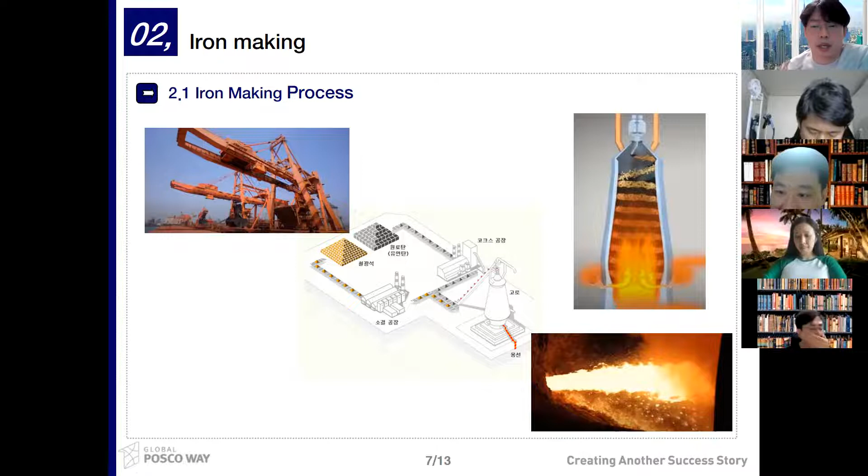We call this molten iron, not steel, because it contains a lot of impurities like carbon or sulfur. So after the steel making process, we can get pure steel. This is the steel making process.

By using this kind of torpedo car, which looks like a potato, we carry the iron to the steel making place and pour it into something that looks like a jar stove. We blow pure oxygen into this stove, and the carbon or sulfur is burned out through this steel making process. Then we can adjust the material composition and temperature to what the customer needs.

The next step is the continuous casting process. As you can see, this is a kind of mold, so we can solidify the liquid into this intermediate product, which we call a semi-product. By the shape of this semi-product, we can call it slab, bloom, or billet.

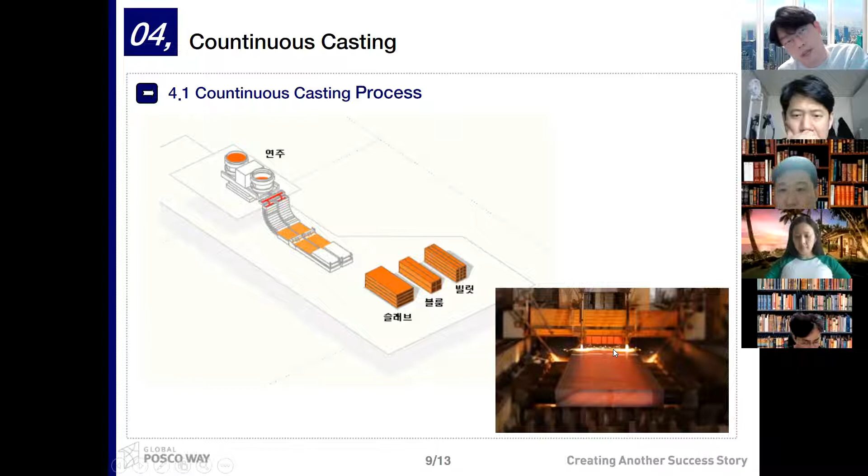As you can see in the picture, this is the real shape of the slab. Because this is continuous casting, we have to cut it with something like a laser cutter, I think.

The last part is the rolling process. When we reheat the semi-product, we can easily extend it by passing it through the rolling mills. We call this a mill. It consists of 2, 3, or more big rolls, and we can extend it to make it thin, producing the final product.

We call these hot rolling, cold rolling, heavy thick plate, and wire rod kinds of products. I know it's really boring, so I prepared some clips to explain about the products.

This hot rolled product is used widely as construction materials and pipes in various industries.

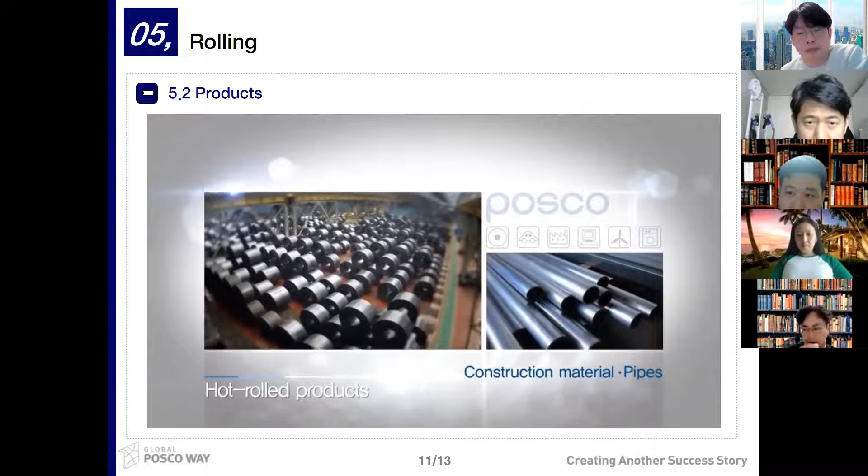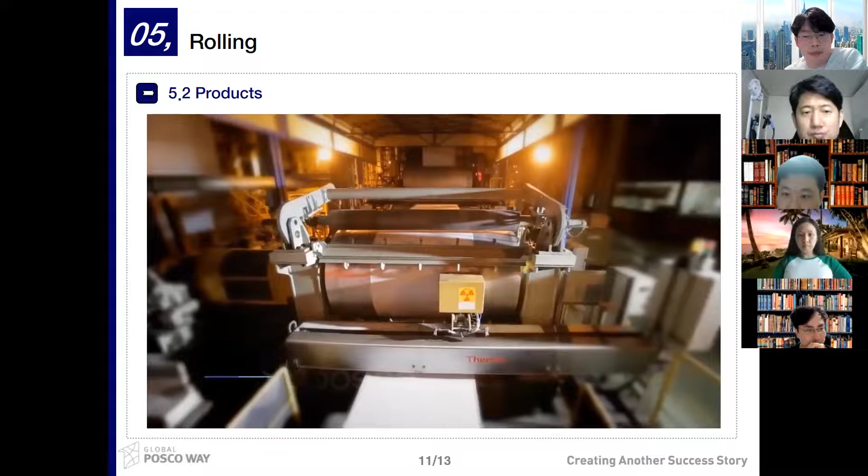Cold rolled products, which are created by making hot rolled products thinner at room temperature, are used in general appliances, barrels, and automobile frames. Coated steel, which is created by coating cold rolled products with zinc, is used in high-end appliances, office equipment, and automobile exteriors.

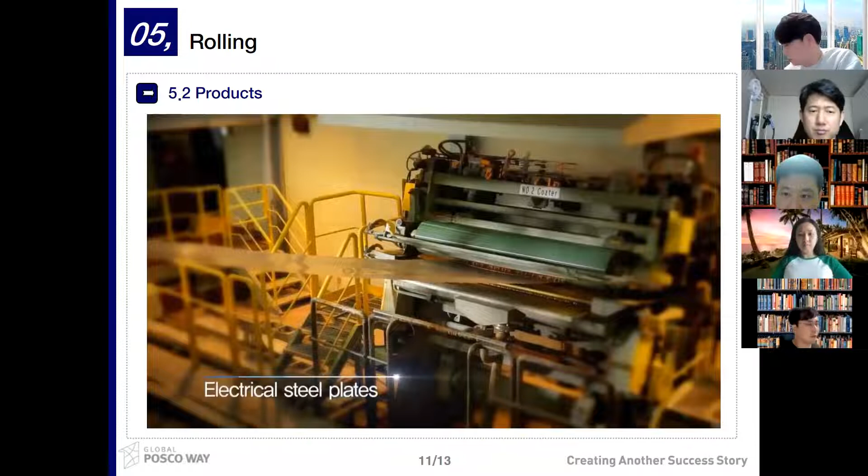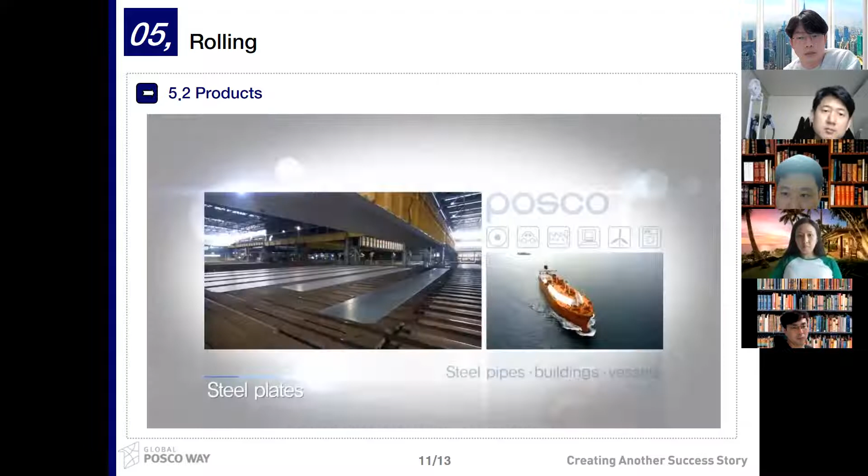Electrical steel plates, which improve electromagnetic properties by adding silicon during the steel manufacturing process, are used in transformers and motors. Steel plates, which are thick and rectangular in shape, are used in large structures such as buildings, vessels, and oil pipelines.

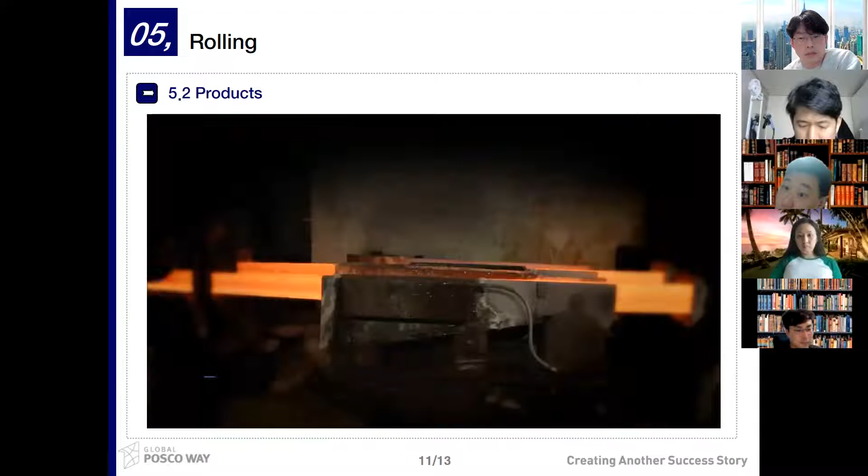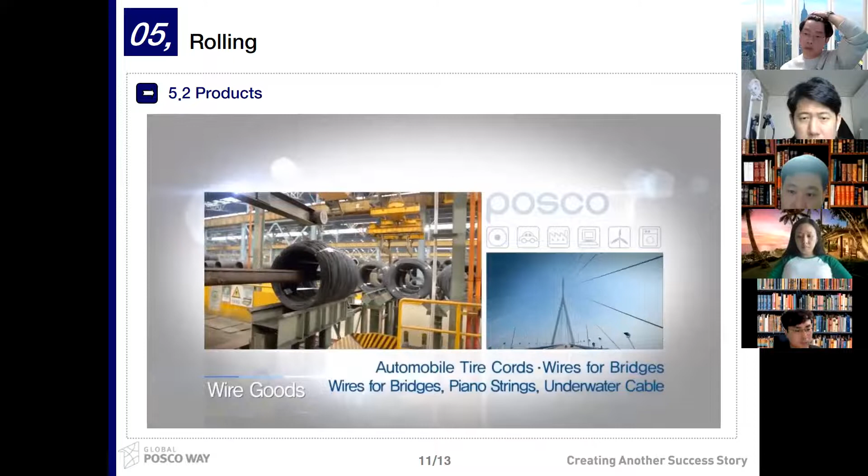When a billet is heated over 1000 degrees Celsius and passed through a roll with a round hole, it turns into a thin and long wire rod, which is used as automobile tire cords, wires for bridges, piano strings, and underwater cables.

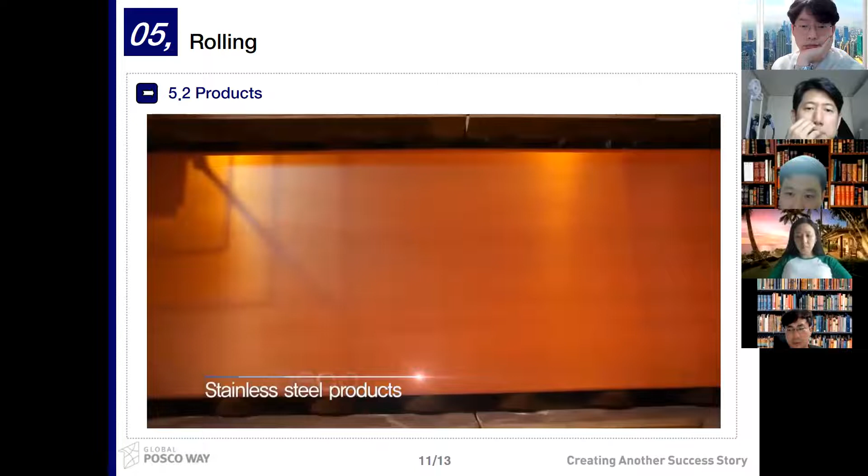At the stainless steel plants, which are equipped with additional production facilities, nickel and chrome are added to steel to produce stainless steel products, which are used in kitchen appliances, medical equipment, exterior walls, and roofs of buildings.

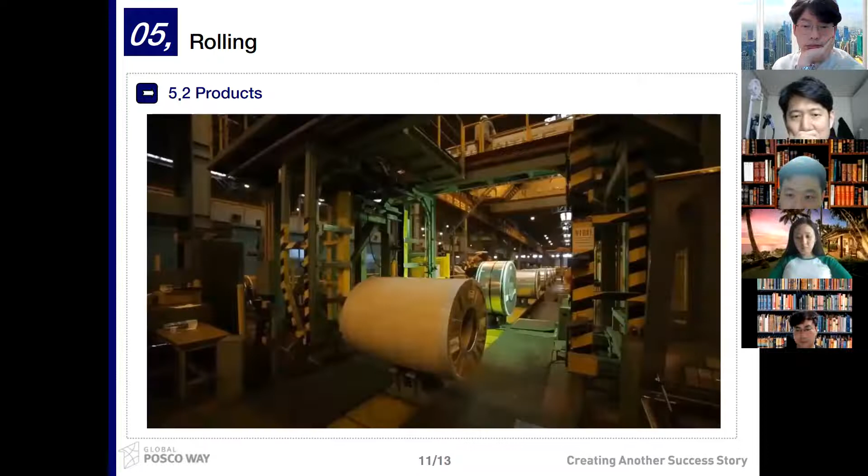As you can see, POSCO steel products are used in every part of our daily lives and in countless industries, ranging from smartphones in our hands to satellites floating in space.

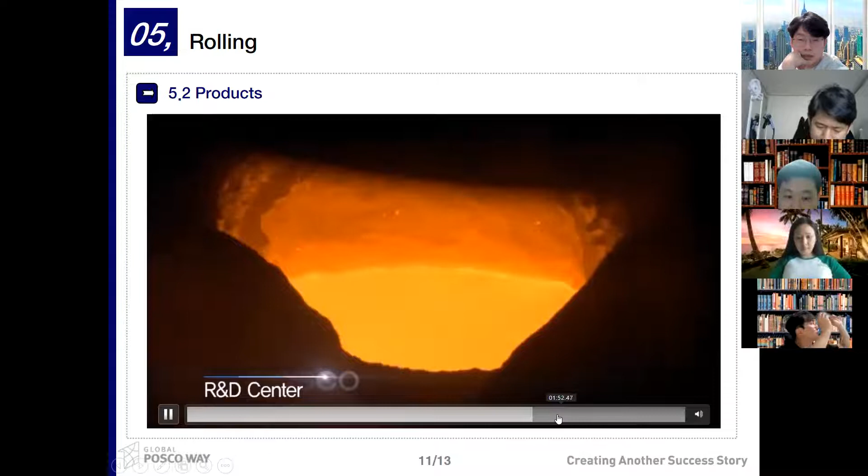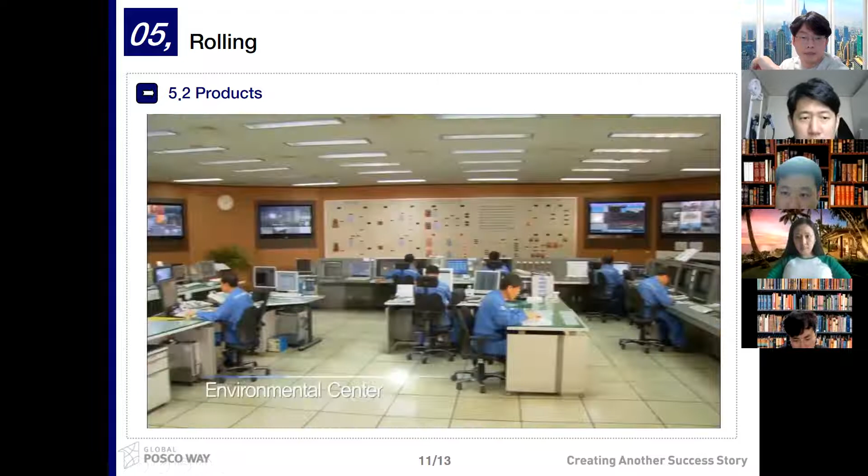Yeah, I think it's enough to explain about the product. So this page is kind of the conclusion.

Actually, in Pohang Works, there are more than 50 factories. In each factory, there are on average 5 operating rooms, just like this. In the future, they will be controlled by just one control room, and everything will be done automatically, maybe with AI helping to automate the facilities like this.

And yeah, this is the epilogue. Actually, this steel making process is very boring and traditional, but as the video says, it's very essential.

We call steel the industry's rice. So I feel proud to be a part of that factory, that company.

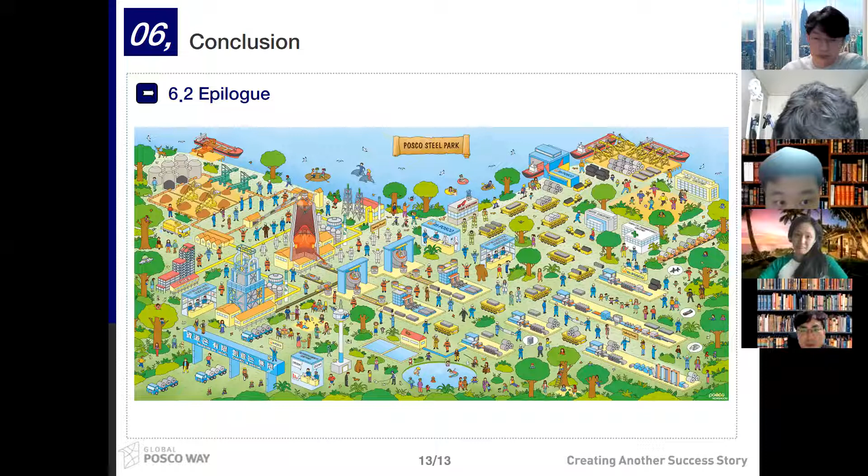Thank you so much, Kevin. Any questions from the audience? I have several questions, but does anyone else have any questions?

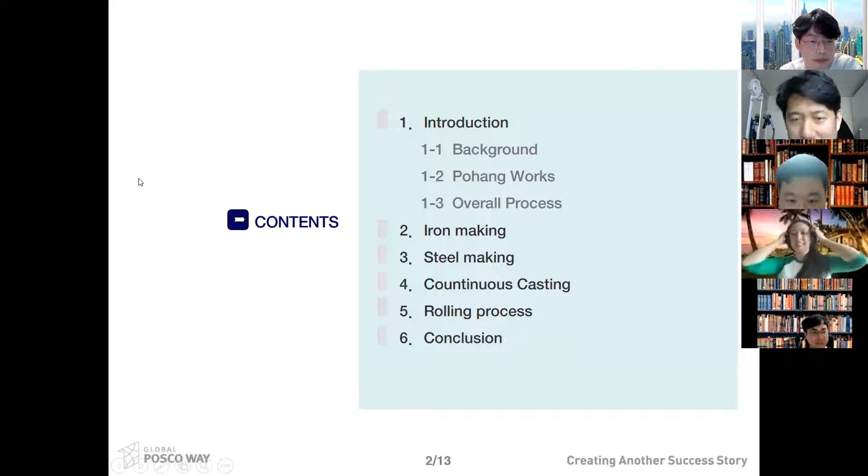Jessica, why— okay, my question is first to Jessica. Why did you— oh, I'm sorry, Inyoung. Okay, Donghee asked a question, so we have some in the chat. We should speak our question, not type it, unless the speaker is talking. So Donghee, could you go ahead and just verbally ask your question?

Okay, thank you, Kevin. Recently POSCO's share price has really soared a lot, so is there any bonus or incentive for you?

I really hope so, but it's not been mentioned yet. So I will let you know if I get a bonus and treat you to some soju later. Thank you.

I think he would rather have a round of golf on you. Yeah, of course. Okay, thank you for the question, Donghee.

Anyone else? Yeah, I think there are growing voices for bonuses socially these days, like at SK Hynix. Oh really? Yeah, I really hope so. I think POSCO is a great company, a global company.

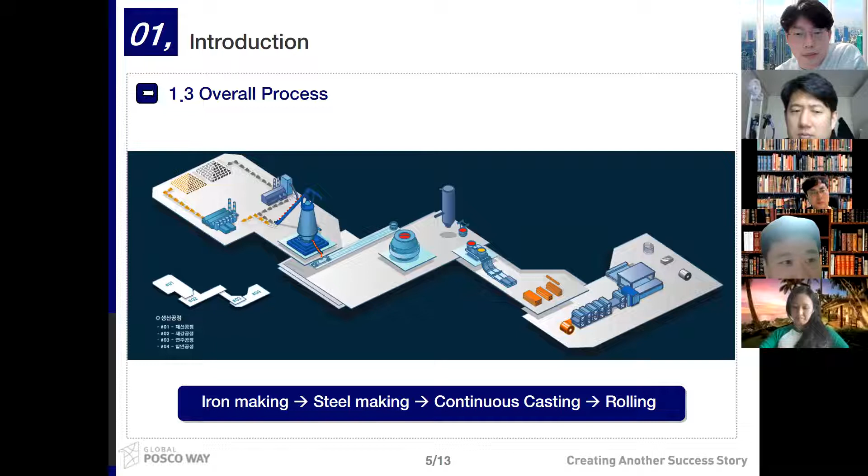Kevin, you just explained that POSCO uses coal, cokes, to make iron. But I saw the news, I heard that your company will use hydrogen instead of cokes for the future. Is that right?

Actually, maybe you heard about FINEX. It is the first process which doesn't use the sintering process or cokes process. Instead, FINEX directly uses this kind of material to burn in the furnace. We insist that this is the first process of its kind in the world, and it will reduce cost and of course help save the environment.

Thank you. Do you think POSCO is an eco-friendly company? Yeah, we try to. Actually, not entirely, of course, because I always wonder if I'm okay with that kind of factories. But they do a lot to reduce emissions of bad things and to avoid making noise for the neighboring areas. We put a lot of money into reducing that kind of pollution, so I think it will be better in the future.

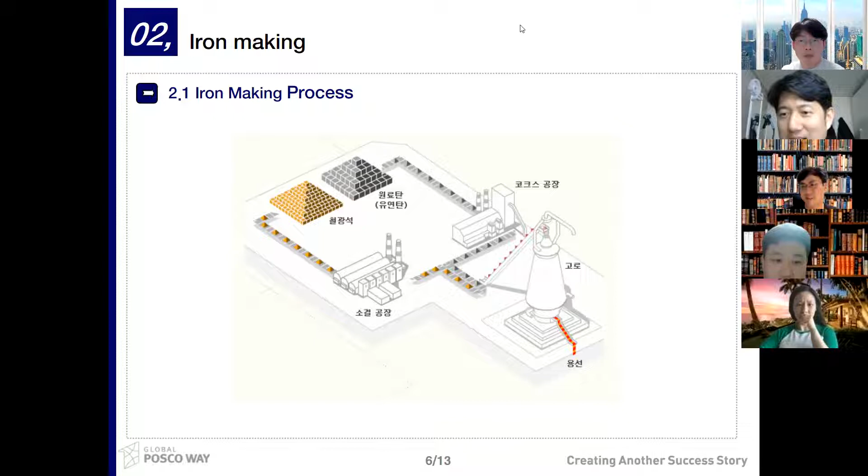I have a question. Namgi, go ahead. I heard that POSCO products were selected for Apple Watch or iPhone. Is it true? I know we made a product for Samsung and LG, but I didn't hear about iPhone or Apple.

I will research that, okay. I saw the news before, so... What is the competitiveness of POSCO? That's my question.

Competitiveness is to produce high quality steel at low cost. Thank you.

Kevin, I have one more question. How big of a threat is automation to the manpower you mentioned earlier? Because that seems like a lot of people. How much of it is being automated, and as technology develops, is it removing the need for all those people?

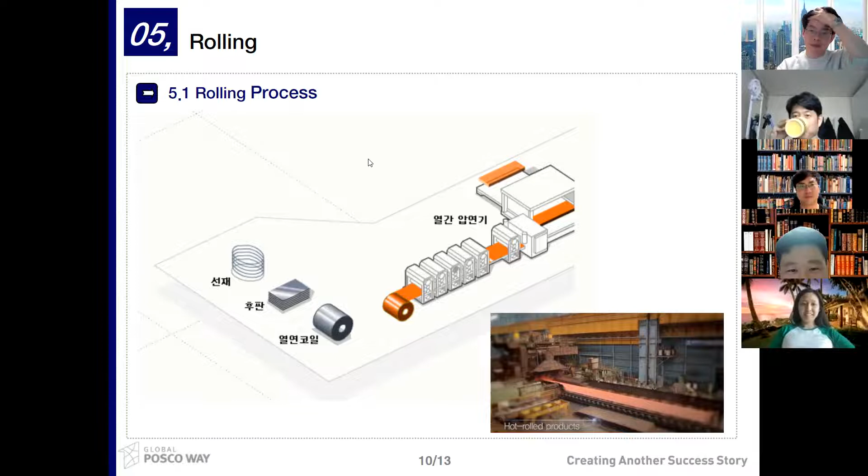I think it was very good and very easy to understand producing the iron. I lived not far from Pohang when I was young. Oh, really? Listening to your presentation, I remember going on a tour to POSCO when I was in school.

I heard your company's president, Jung Choi, was reappointed a few days ago. I hope Kevin will take the position later. Thank you.